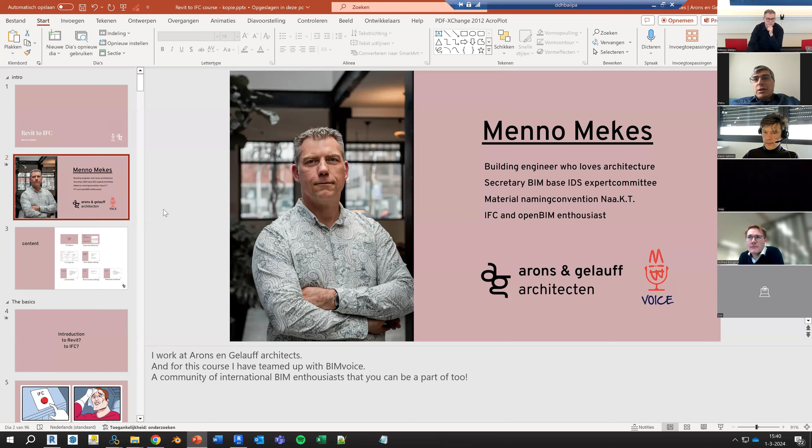So this is me. Basically, how I divided the course is, of course, some basics, not to IFC, but to Revit. Basically, this is the main problem, right? We need to export. We want to push a button, and if your settings are correct, you can. And as to who it is for, there is of course more in these chapters. First of all, the tools and references, and what you see here is the version that I have used.

So I used Revit 2024 with this exporter. And the exporter is one of the most important things about exporting to IFC, but of course there are many other things like global settings that you need to set in Revit yourself or per project. And of course the external files. You need to have your shared parameter files.

Maybe you want parameter mapping, user-defined property sets, and your IFC export classes mapping table, assembly codes if you use that, keynotes if you use that. So there are already 6 different files that you need to work with and set at the correct position. And then, of course, every element has to have the correct entity, predefined type, and properties. So I think this is the basics. It's quite a lot, I think, but still.

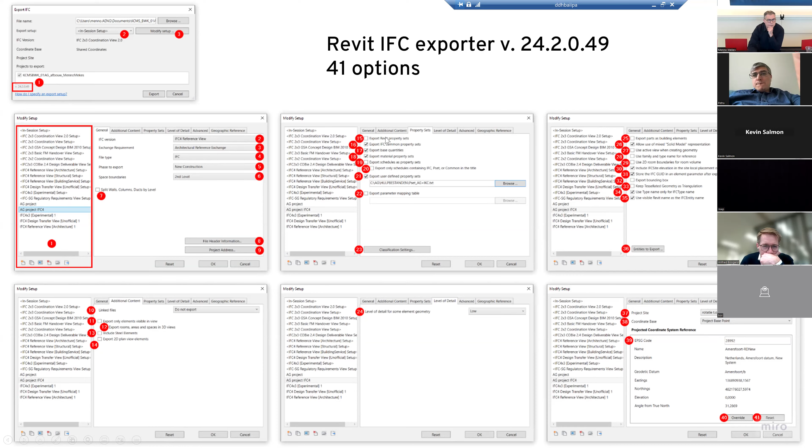But let me go through just some examples. So this is how the course is. I'll go through everything like a PowerPoint, explaining it with some examples. And after that, I have a demo where I show how I do that in Revit itself. So I think the most important thing is the property sets. That's why I kept it here, because that's the main thing about exporting the properties, getting the parameters in the right position.

So what you see here already is that there are a lot of property sets to be exported. So exporting Revit property sets is not something that you want. Let's see what we have here. So this is basically the IFC properties, and if you think that there can be an acoustic rating or a fire rating in your wall, you should export it. This is from buildingSMART International, so this is a fixed list, but it's not always complete. And these are international definitions. They may refer to the national building regulations. Like here, the fire rating always says, according to the National Fire Safety Classification.

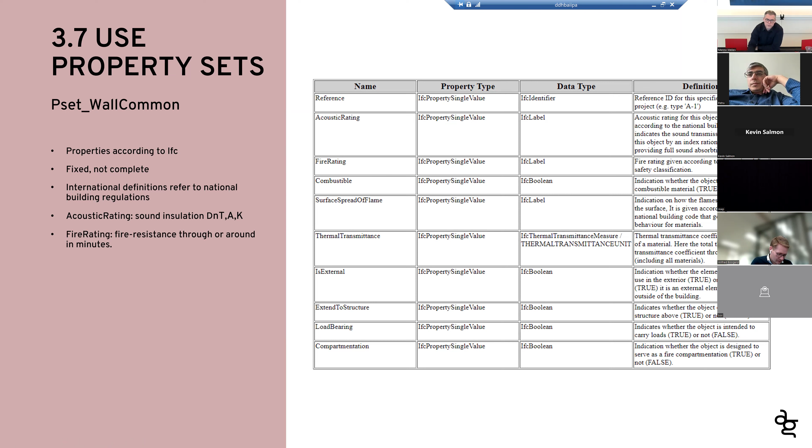And that's why fire rating is a text and not a number, because we would say fire rating is 0 or 30 or 60. We mean 60 minutes, but we only use the number 60. But maybe in other countries they have a letter in front of it. So it's a text instead of a number, and you can define that here: label, boolean.

And about the covering, for example, if you have a regular covering, these are all the IFC properties that you can have. But if you are creating a ceiling or a flooring, then you can have some extra property sets. So if you are doing floor tiling, you can add these two parameters: does it have a non-skid surface, or is it anti-static? Because that only refers to floors; it's useless to say that a ceiling has a non-skid surface, for example.

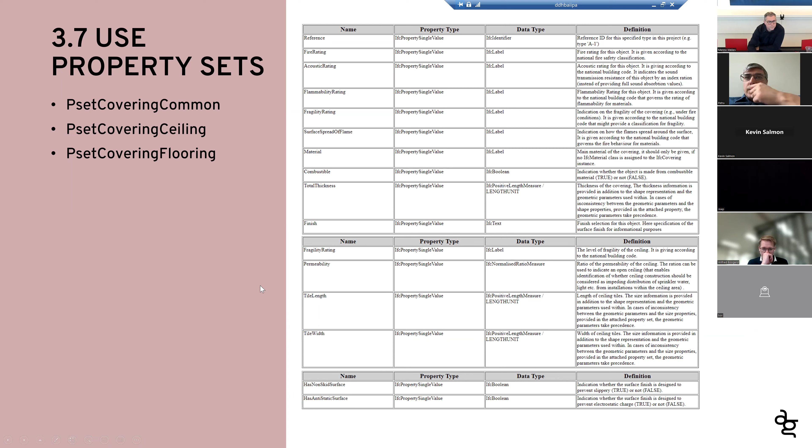And especially dimensions, you don't want those, because in order to create a window frame that's 3 meters wide and 2.5 meters high with mullions in the middle with different dimensions, you need like 50 or 60 different dimensions to set the whole window frame to your wishes. But in the end, in the IFC, all you need is the width, the height, the thickness, the manufacturer and the model, or maybe some other information. So you need a lot less information in your IFC export than what you would need to model your family. And that's why you should always work with IFC.

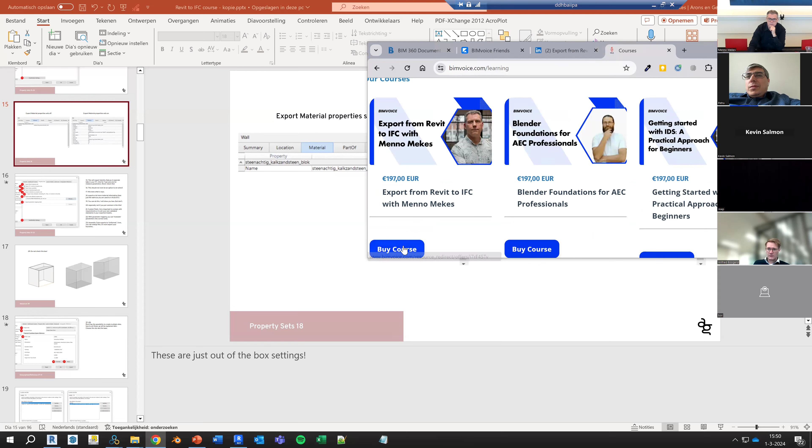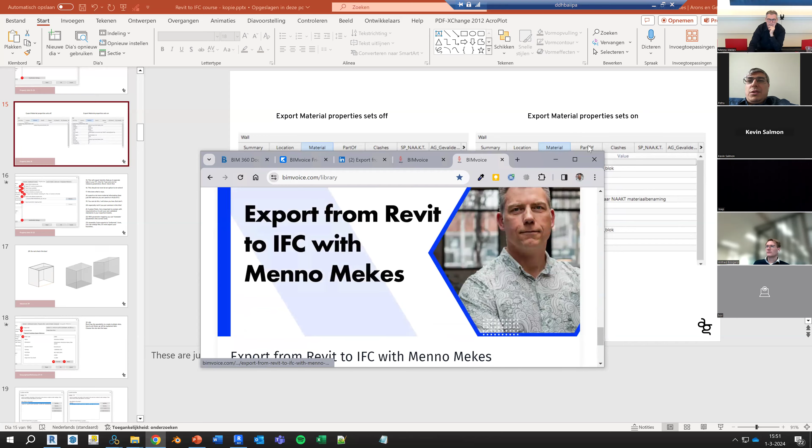Ooh, I don't know exactly. Can I click here? No. I do have it, but no, you have access. Yeah, I need to find it. Where was it? This is the community, so it's not here either. Yeah, I know, but maybe you'll find it in another place. Otherwise on your email maybe. If you check your email for an email from me, from BIMvoice. I did, but let's see where it is. Should be here in my library. Yeah, scroll down. There it is. I knew it was here.

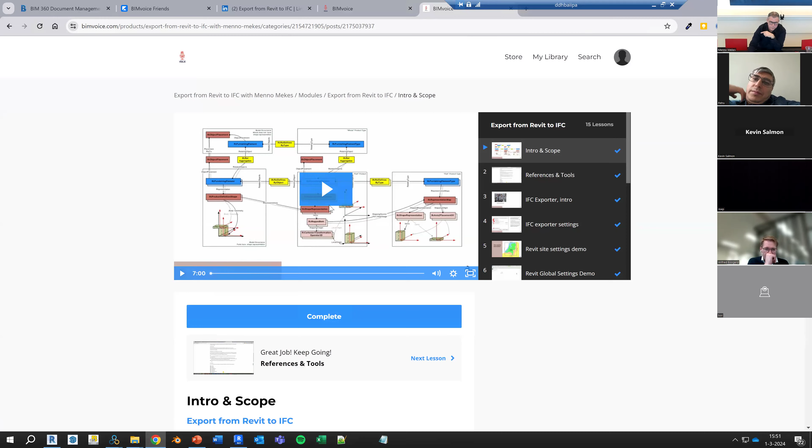So this is how the course works. Basically, you get a nice introduction and a thank you for purchasing. And this is 7 minutes, and if you go to the reference and tools, you will see downloads, and in downloads there are assets, like everything Menno has used in the course, so you'll be able to use it yourself. Including the presentation, the PowerPoint of the course, and the files, Revit files, IFC files.

Yeah. So what I was now explaining is divided in a couple of videos, so you can see here how long it will take. Site settings, quite important. I think you don't need to go through each of them. I mean, just the chapters, like what you are covering. You're covering the settings, then the global settings in Revit and so on, so people can understand the scope.

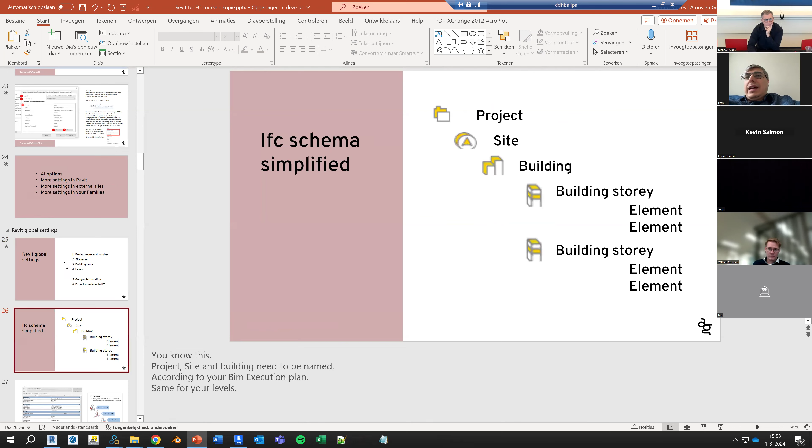But it's important to understand, of course, it's not an advanced course. It's a course to get you started. If you are a very experienced user, probably it will help you with another point of view. But if you are not very confident and if you struggle with this, then this is definitely for you, right?

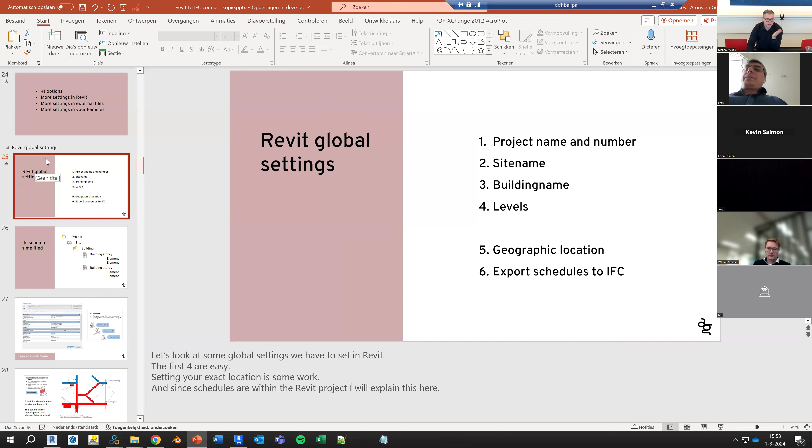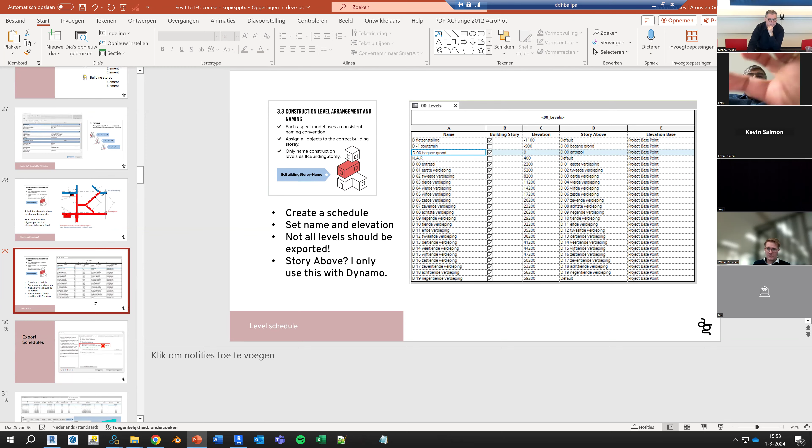Yeah. So here's one example about the global settings where you can set all these six things, like the name of the IFC site, the name of the building, stuff like that. This is how to set your building stories. Exporting to schedules, also explained how that works. The big cross here, I think that's important to know, because I am an IFC enthusiast. So this is something that I think should be changed, because if you want to export a schedule, that's possible.

Actually Pset, but especially Common, is something you should never add yourself to a property set name, because that is reserved for the actual common property sets by buildingSMART. For the official ones. So you get confused if you create a Wall Common and that turns out to be a schedule that has a width and some strange parameters that are not in the IFC schema itself.

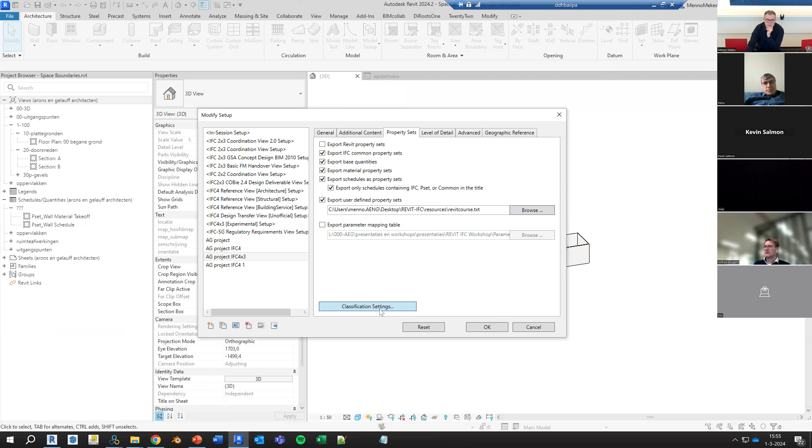You can just go to Revit, export properties, and here, classification settings, or you can set keynote, but here you can say I want to have the NL-SfB, and here you can say assembly code. So basically, you are renaming the assembly code to the NL-SfB table 1 or whatever classification you need. I explained how this works in the course.

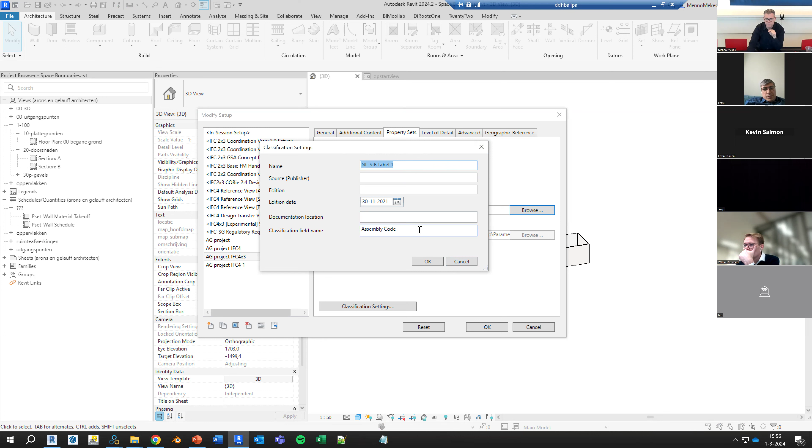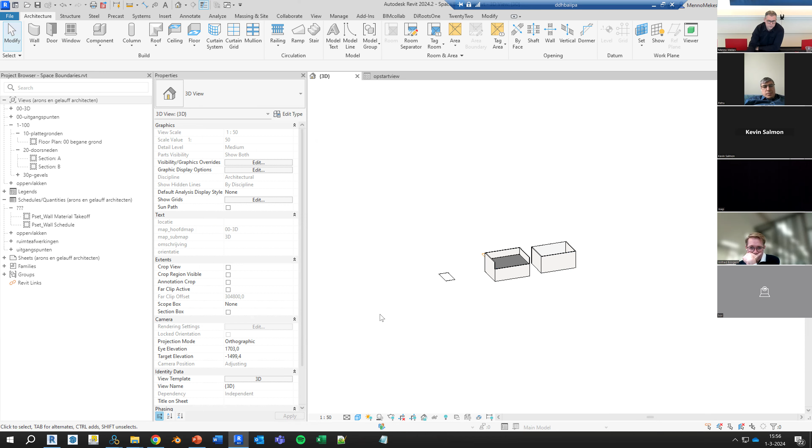If you use keynotes, you can also export keynotes as classification, but then you get your assembly code again as Uniformat, which I think is quite stupid. Uniformat is an American classification system, and we don't use that. Actually, there are many classification systems. But for that, you can just add, do I have it here? Somewhere, it's in the course.

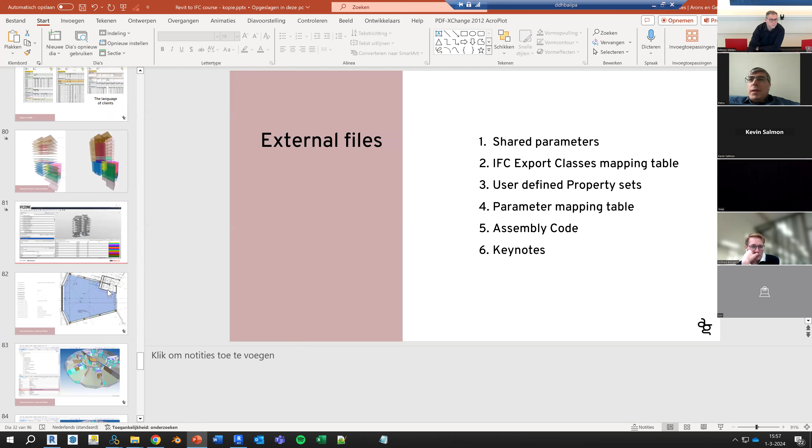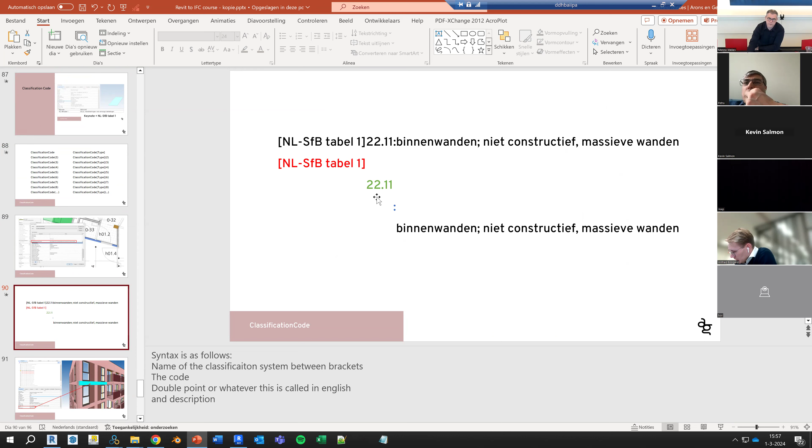So basically, one element you can classify into a million different classification codes and systems. Just add a number to it, either as instance or as type. And this is the syntax: between square brackets, the name of the system, and then the classification code and the description. That's how easy it is.

I'll show you the model itself. For example, this wall has this classification, and I also added two other ones. So this wall has three classifications. One is the system that we use, the NL-SfB, and the other one is the status. You can use these classifications for everything, like a digital markup, a digital revision. So you can see this is ready for checking.

You can say it's ready, it has been changed, and you can use a date. So you can filter and sort your model even better. And for cost calculations, maybe you have a different classification. You can add whatever you want. Just don't use the assembly code.

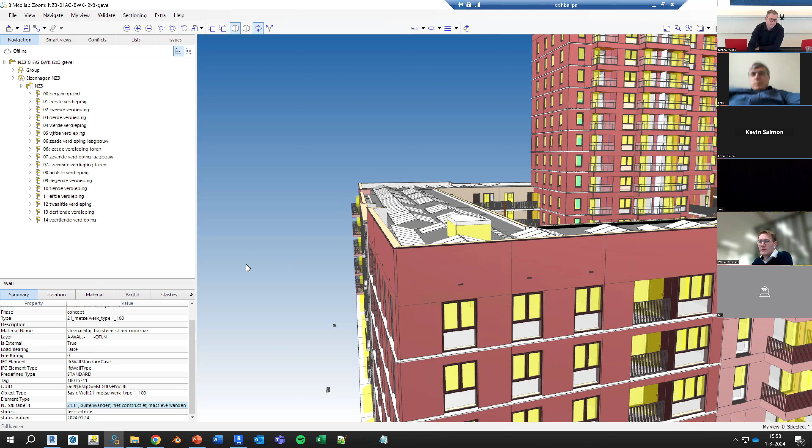I don't like the assembly code, especially because it's a type parameter which is baked into Revit, and you cannot associate your nested families with that parameter. If you use a classification code, you can. It's just an instance parameter, and you can push the value through to all the nested families. That's your question.

And where was it? So it looks like no one else has any other questions. But that's good, that means you did a great presentation, Menno. There we go, we got one.

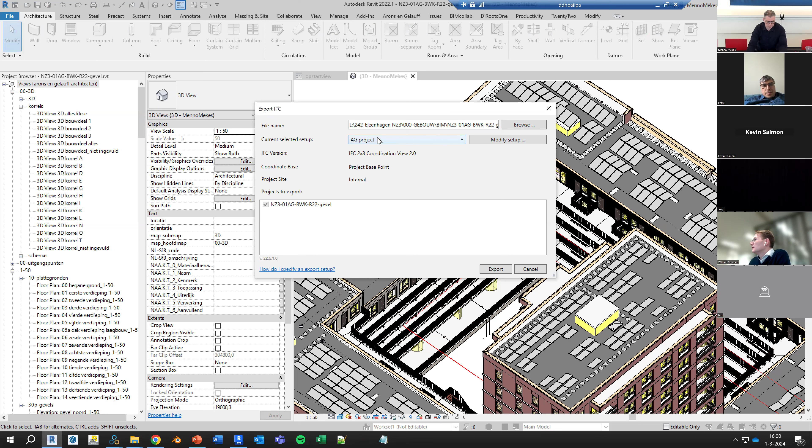I need access to model coordinates when you export. Basically you go to your site settings. You can easily see the coordinates in BlenderBIM, and edit them if you need. I don't know what tools you are using, but I think it depends on the tool.

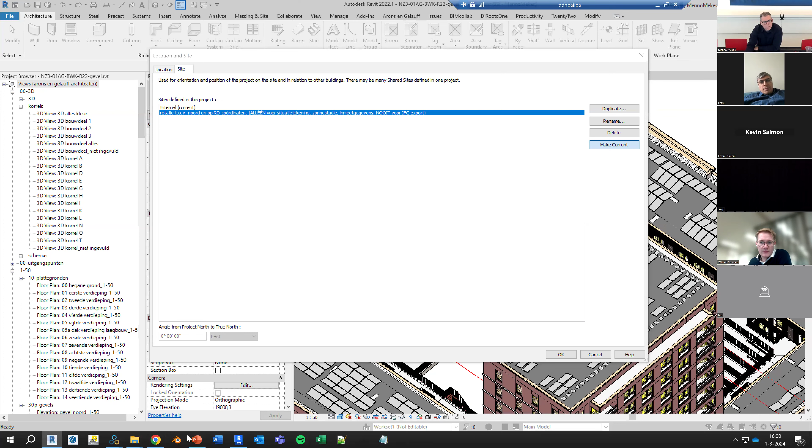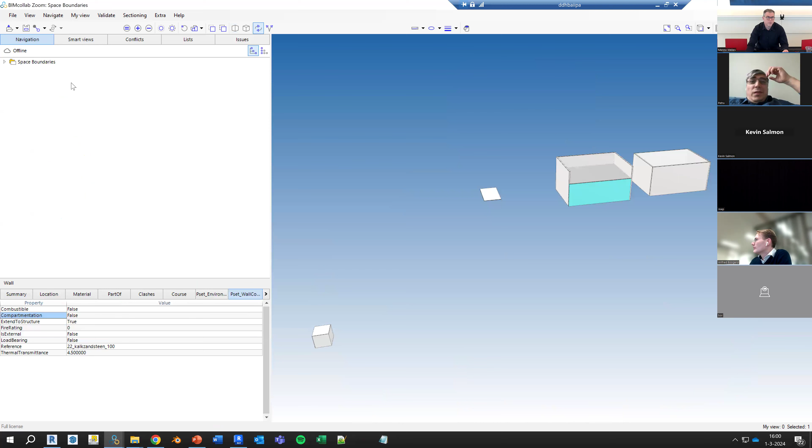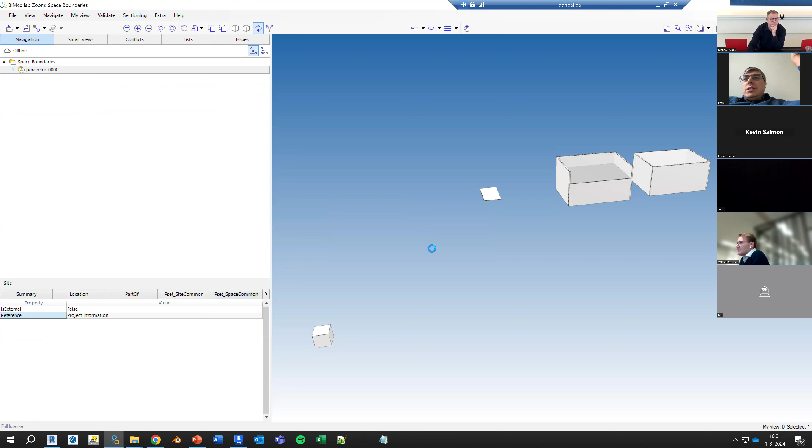Or you could go here, probably project. No, the site. It's the location of the site. So you can see here the WGS84 location, which was already in 2x3. This is a 2x3 model actually. And in an IFC4 model, I'm not sure. I think usually you need to select the model file name in the file tree, and then it will show you that.

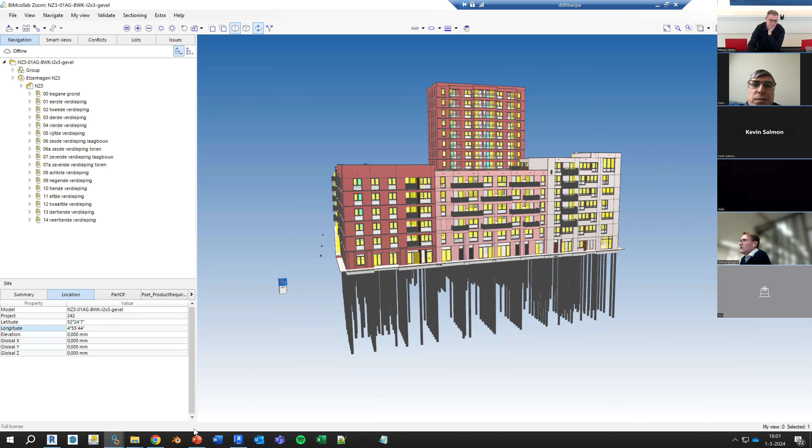You can go into the projected CRS. I'm not sure how, but it's there. You can find it, I think it's here with global XYZ. You will get it correctly, though I'm not sure if I have a correct exported model for that.

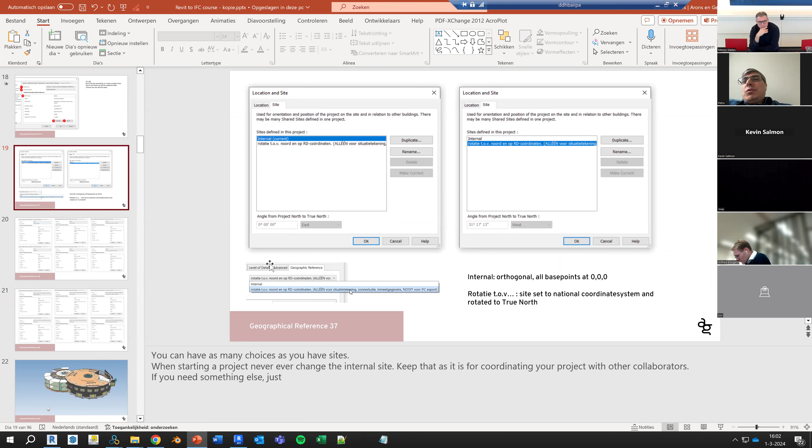What you see is that there are many possibilities in coordinates. Menno, coordinates are a very delicate topic. I think we could have a full course just on coordinates, because geolocation is very complex. We're going to have more workshops on this with other guests and debate it further, because it's not as straightforward as it might seem, and it's a bit challenging.

Actually, you can see it here. If you have the setting set to internal for your rotated element model, you can use the project site set to internal, and then there are six choices: shared coordinates, project base point, project base point oriented, and true north. So these are the options. If you do this with internal, you can see everything is at 0, but the RD system that we use is here.

I also explain how you can do this in Revit. But if you set it to the rotated thing, then you have different choices. Shared is still 0, and here you can see the eastings and northings, and the angle will be shown. This is how it will be exported to IFC, these coordinates with the rotation.

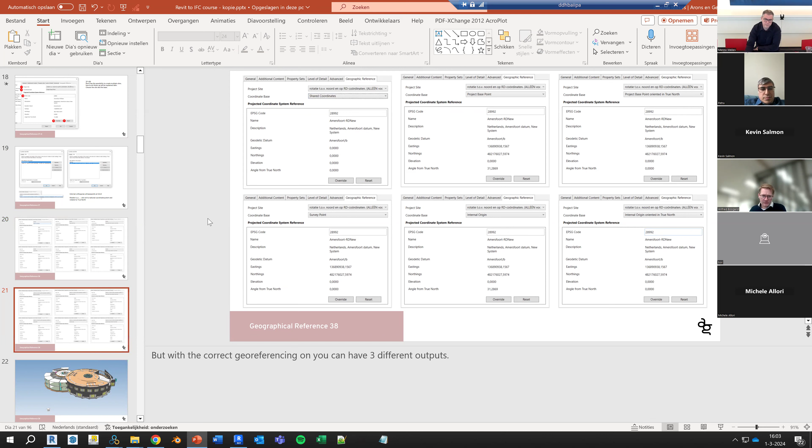You can see there are basically two different settings that are correct, and the rest are incorrect, unless you want the location but not the rotation. So for every site you have, there are about six options. Basically, look at them and see what you want, and of course check your model, because otherwise this is what you get.